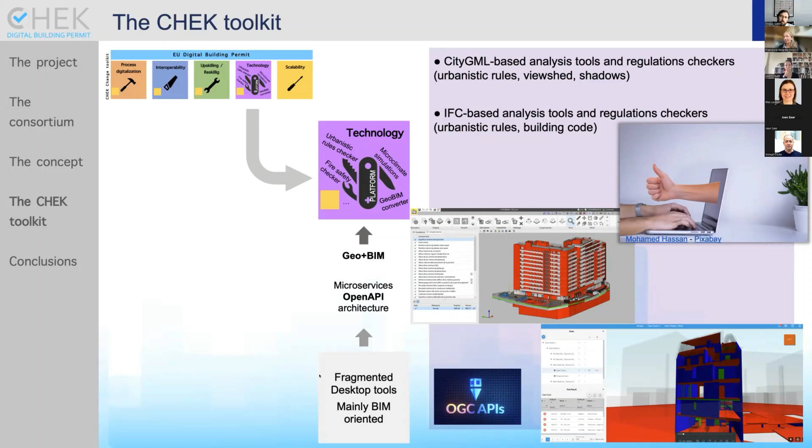We'll develop them further in order to automate the process more, also by the use of standards, and especially we'll care about the interoperability of the different components that have to cooperate within the final tool. Open APIs will be a critical part of it.

Finally, we care about scalability. So we need to demonstrate that our solutions work in all the municipalities we have in the project, but we would like also to involve more case studies within this CHEK community of practice. More information will come soon, but we would like to involve more building authorities, and also other kinds of stakeholders, in order to double check that the information we get as input, first of all to base our developments of, so for example interviews, questionnaires and workshops that we'll do at the beginning, but also to give some feedback on the solutions that we will provide later, to test that they are good for them as well, and they can work for most municipalities in Europe.

So this is more or less our goal. And with respect to scalability, we'll also provide - we have a good connection with standardization organizations. So we provide some standards and best practice documents, and a modular open API-based architecture for the software.

And I conclude here. So we'll have a very practice-based approach, starting from the practice, going higher level with the developments, and testing back with them to provide feedback and improve. We aim to provide this for all European municipalities and other stakeholders involved in the digital building permits. We'll do it with respect to digitalization, scalability, and interoperability, and with respect to all the points of process, data, technology, and people. Thank you for your attention.

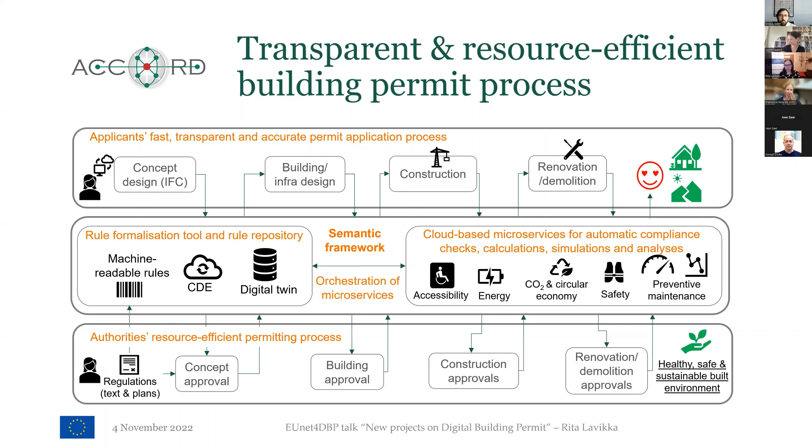In our project, we will focus on this rule formalization and creating a kind of a semantic framework that allows computers to do this data exchange as efficiently as possible, but also maintaining the human in the loop, so that those that are experts in those building permitting issues can focus on those critical issues, not focus on those that computers can make automatically. There are certain things that can be checked, but humans and authorities can focus on those more difficult issues. With these kind of cloud-based microservices, you could do in the background all kinds of calculations and simulations and analyses that can help humans to build a better built environment for all of us. Okay.

This is about our expected results. Similar to the CHEK project, we will start from this basis for sustainable digital transformation. In our project, we think we need a semantic framework for both processes and rules, as well as data and tools.

We also need to think about the processes that building permit applicants and authorities are involved in, and how those should work. We will try to integrate already existing microservices, but we will also develop one new tool from scratch, which helps authorities create machine readable rules. That is something which hopefully will come in the future, so that we write regulations both so computers can read them and so humans understand them.

We will also validate our results in real-life construction projects. In Finland and Estonia, we will focus on environmental compliance issues, but also other issues. For example, in Finland we will also consider accessibility issues.

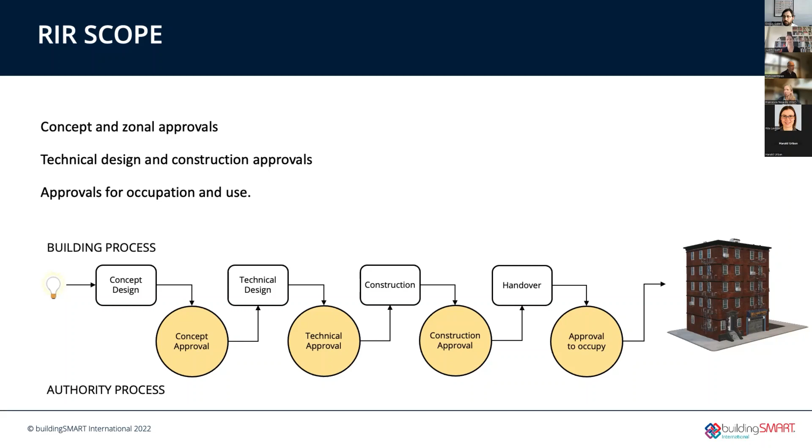We have two ways to harmonize data, or two fields of data harmonization. The first one is very technical - where and how the information is stored. The second one is more about how we use the information - how is the information used and what information is needed. In the regulatory information requirements project, we are handling this. We have basically the technical layer.

Of course, we rely heavily on IFC - that's the core of buildingSMART in general. On top of that, we have lots of different property sets, properties, local and international, and then we have the buildingSMART data dictionary, which can connect those local and international properties and property sets. Beyond that, in the technical layer we also have national and international coding systems and classifications. And buildingSMART has just introduced this new standard called IDS, which we are going to study how we can use in setting up the goals.

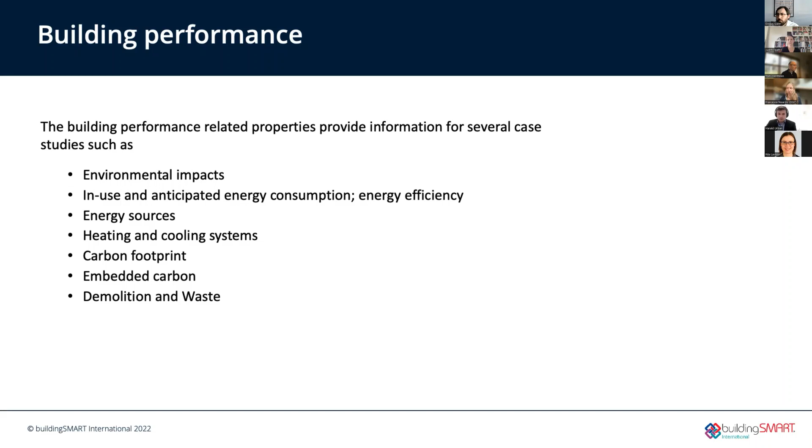Of course, that's a big topic at the moment - energy sources, heating, cooling, carbon footprint, embedded carbon, and maybe also demolition and waste. But like I said, we are focusing on the technical side of these things, and these are just kind of background, initial information for us - what information is actually needed.

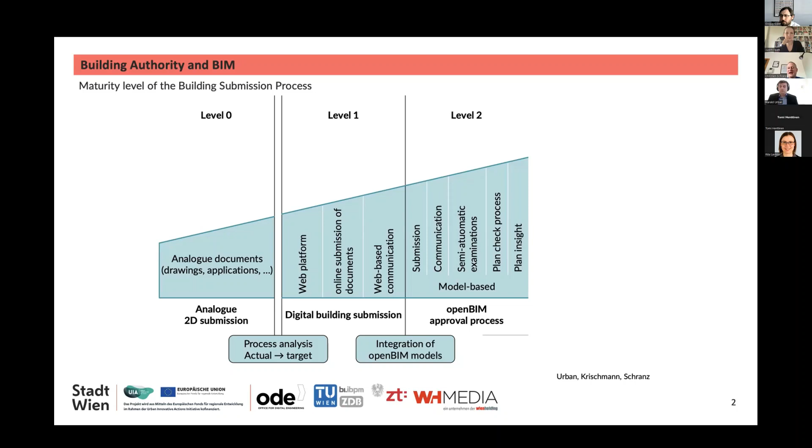The step we are looking at in Austria is the integration of open BIM models, and to make the submission, communication, and everything model-based. So how far are we now?

It's based on 3 different kinds of models. We have the architectural model in level of information 300, which we call BAM, the building application model. We have the checking model, where everything comes together. MA37, as we call it, is the building police in Austria - it's actually the building authority which checks all the buildings. Then we have a reference model, REM, and a model which, unfortunately, when we chose the name, wasn't very smart, because it's called AIM, and AIM is also the asset information model in OpenBIM, but in this case it's the application information model.

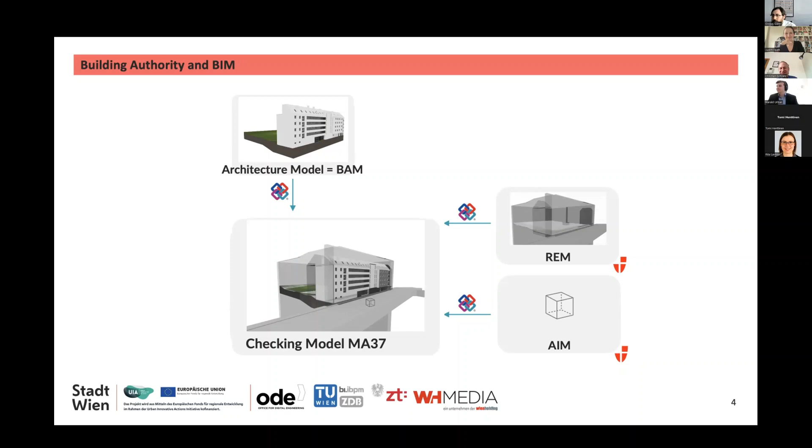We always tell the building authority why they should use OpenBIM. Of course, first, it's no restriction, and the IFC data structure makes it suitable for long-term use, and building authorities have to be able to use the files like old plans for the long term. We always show the Revit file in a text editor, and you can see pretty much nothing - you can't read it, but if you use the IFC file, you can work with that even in 100 years, as long as the file is not corrupt. You can read it, you can make an IFC editor. So the building application model has to include all the information we need from a geometric point of view.

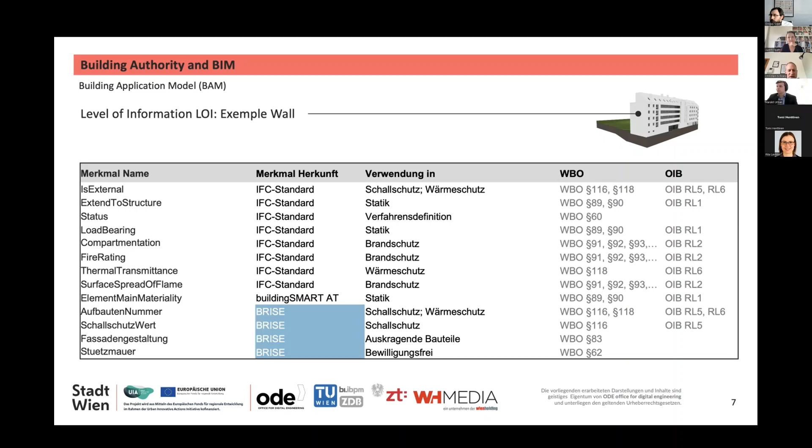We were going through the Austrian standards - you see WBO is the Viennese building code. We were looking at all the different paragraphs and asking, for what do we need which information, and which of them are IFC standard, which are already defined by buildingSMART Austria, which is buildingSMART AT, and which we had to put in as new parameters, new properties, whatever, to include this information.

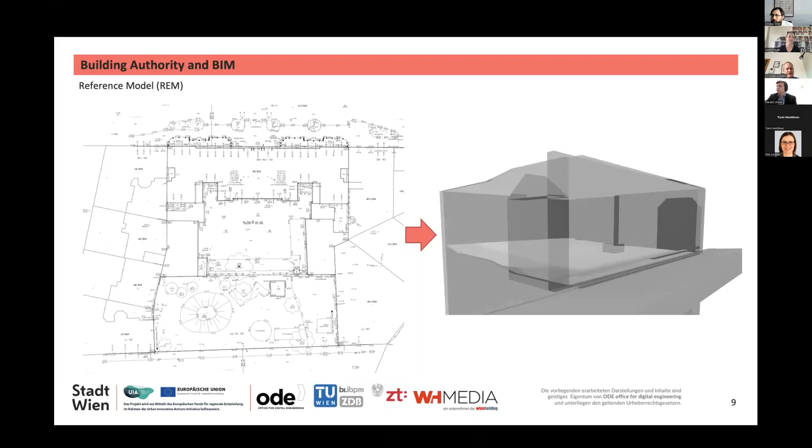The next model is the reference model. The building application model is the model the architecture is doing, and the reference model is when you look at the plan and the construction site, then you have information on how big your building can be, all the dimensions which are allowed by the regulations. So what we make is like a surface model of the allowed model, of the plan. This reference model is done at the building authority.

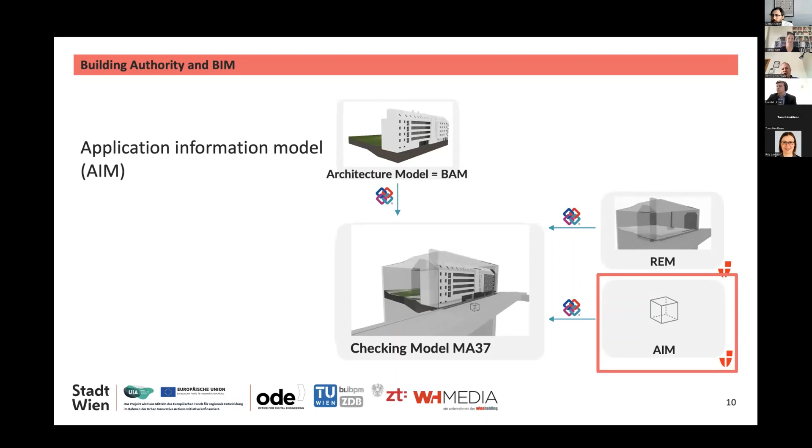And the third one, because you cannot put all the information you need for an approval process in those models, is the AIM model, the application information model, where you have extra information. In Austria, you have specifically some extra information - for example, you have a text attached to your plan, to the construction plan, to this plan where it defines how you can build and how high your building can be. And it says, for example, you have to have a flat roof, and 1/3 of this flat roof has to be a green roof.

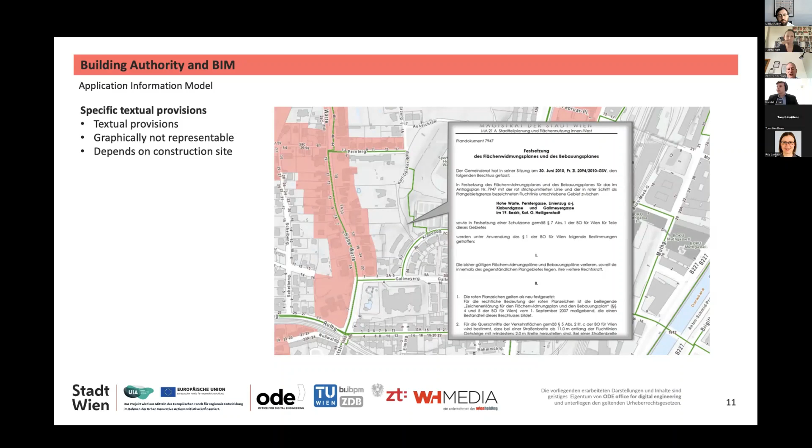And this information you cannot put in as geometrical information because it's not here yet. So we read the text out - we use artificial intelligence to search for certain parameters in the text and give this information to the BIM model, to the reference and AIM model. This is the way we graphically show it: okay, you have a roof, it has to have this certain inclination, different height, and so on. This information, which is just provided as text and not in a geometric form, can be used then.

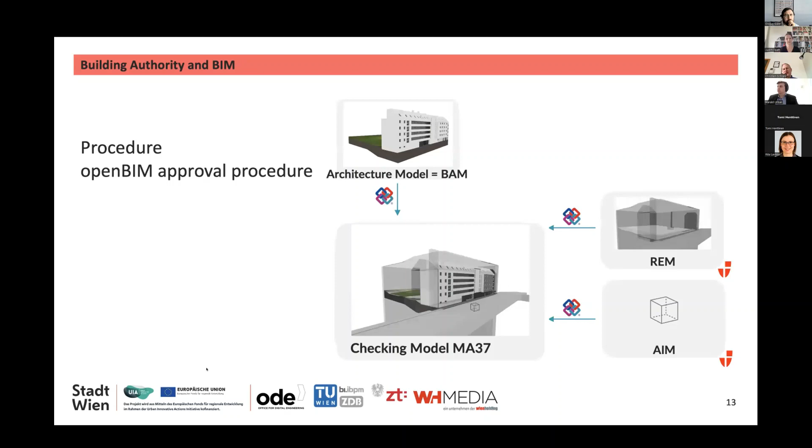And then we put it all together in the checking model, and you see the architectural model, the surrounding model, the surface model, and the AIM, and the checks are starting. We have different kinds of checking routines.

First, before I talk about it - we checked all the building law in Austria, and we found out that about 434 paragraphs can be used for checking. Some of them have to be created completely new, some of them can be programmed in - we use Solibri, by the way, in this case, and can be used in Solibri, but you have to use the API of Solibri. So we were cracking a lot of that. This is the building law checking, and in the structural checking routines, we added a total of 1,222 paragraphs for the checking.

How do these rules look like? We have three different kinds of rules.

We provided one automatic checking rule, so you automatically get a result. Then there's semi-automatic, where you get a result, but a decision is needed by the officer. At the end, the officer always has to sign it or approve it, for legal purposes.

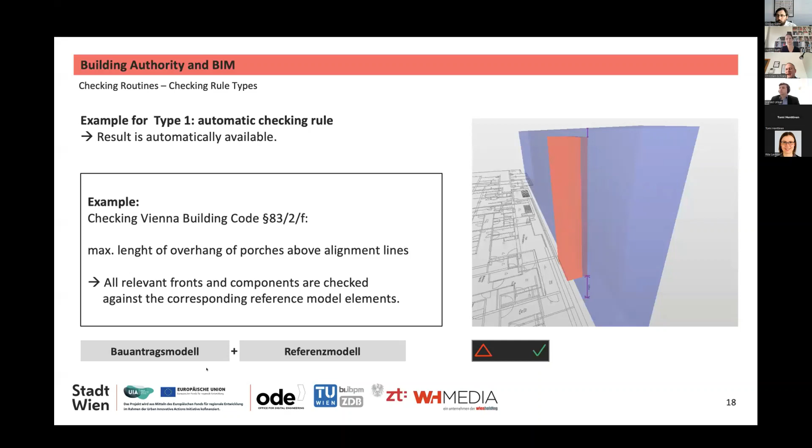There are also supporting checking rules, where the graphics of the BIM model help the officer make a decision. For example, an automatic checking rule: there's a balcony, and in Austria there are certain rules for how far the balcony can extend above the alignment lines and at which height. This can be done automatically. Harald will also show you some rules we programmed which are also automatic.

Another rule example: if you have a bathroom or a room where there could be water, then you need insulation. So this rule shows the rooms which are bathrooms, toilets, and so on, and also shows whether there is insulation below that or not.

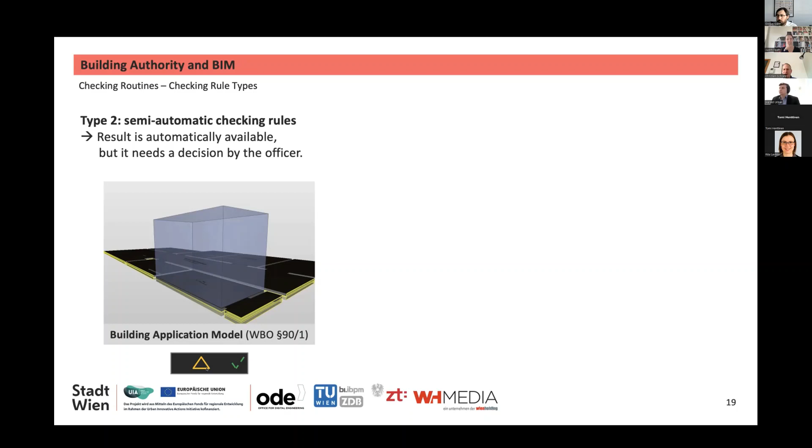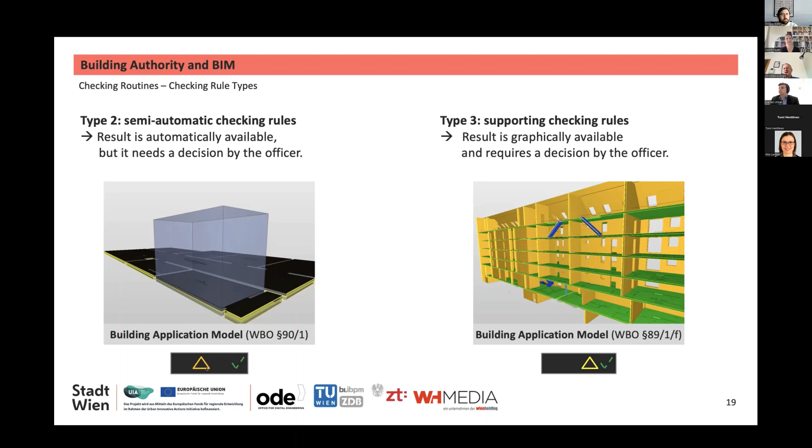The supporting rule would be, for example, to show all the load-bearing construction and whether it's visible. In addition to this graphical representation, you need a pre-static document, but that's something different. The officer at first can say, yeah, it looks reasonable, and then look at the static document.

And now we come to the programming. We want to show you some rules we were using, or that we programmed completely new. And now it's Harald's turn in Vienna.

Hi, so we have also programmed our own test checking rules in this European research project using the Solibri API in Java. Solibri has about 50 templates that you can use for checking. In this project, we programmed 25 additional templates, which massively extended the functionality.

For example, checking the height of the fall protection of the window. In Vienna, this depends on the height of the fall. So for each window, we have to look at the height of the fall and check the length between the window and the covering.

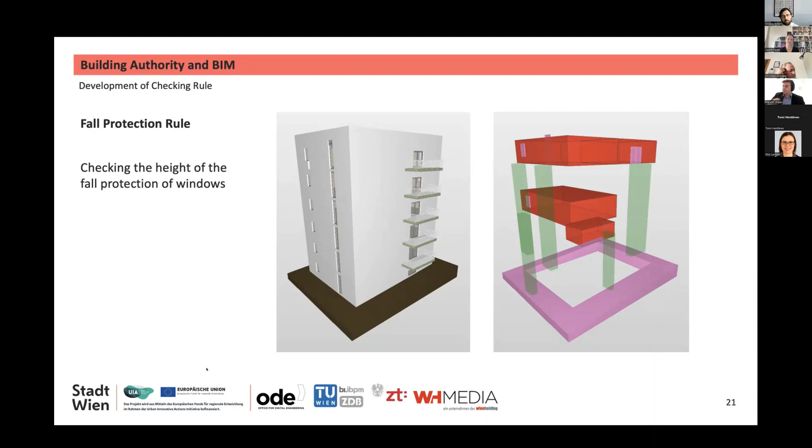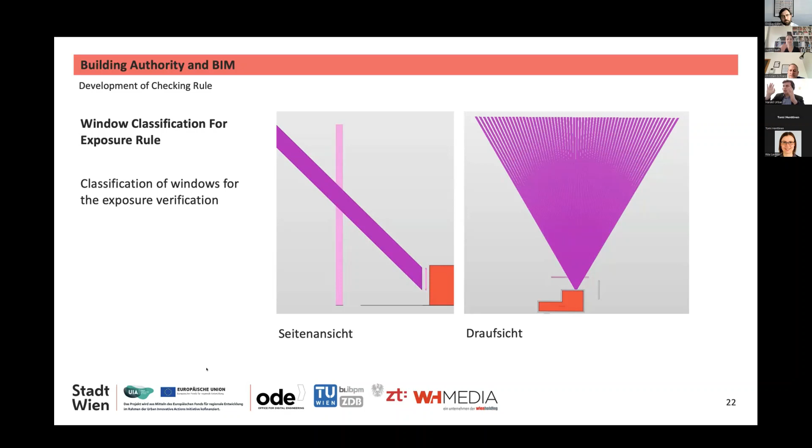The next verification is the verification of a window, used for exposure verification by means of vertical and horizontal building. So we check whether there is a building between this window and the source of light.

I like this next rule because it's very time-expensive to check on the plan. This is the exposure verification of window areas, which depends on the depth and the area of the space. When I was a student, I worked in a building authority and I had to use a ruler to check the depth of the space. With this rule we can automatically, fully automatically, check it with just the start of the checking routine.

Harald, just to add one piece of information: the law in Austria is that for a main room where you can stay and live, at least 10% of the area has to be window area. And this window area, as we saw just before, has to have certain geometric information about the building next to it, so that the sun can really come into the room.

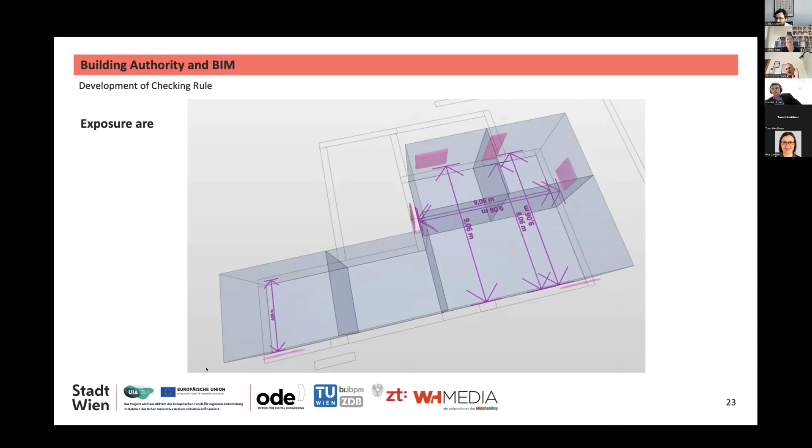And when the space is deeper than 5 meters, you need 10% more than the base 10%. And the most complex rule development is the escape route simulation and testing. With this rule, 90% of all paragraphs in Vienna can be checked automatically.

And the next step, we want to generate a new IFC file from these rules, which includes the escape routes.

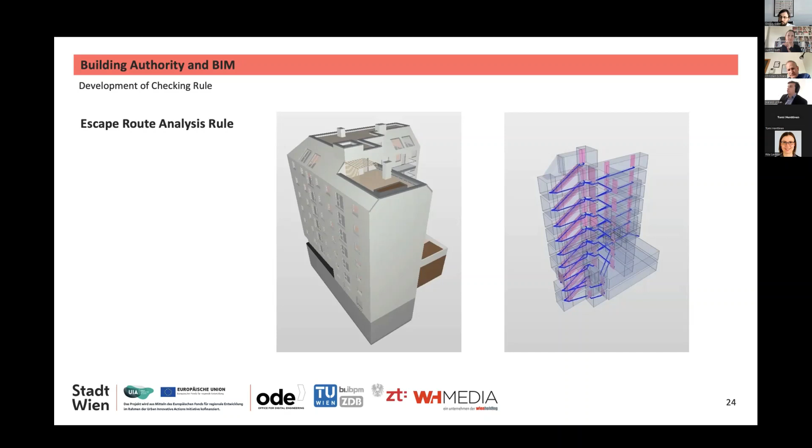So the project has now been running for 3 years and will be completed in March next year. We're therefore already in the final phase, the pilot phase. We now have certain real submissions using OpenBIM that have been submitted and checked. At the same time, we have created 10 test models in different authoring software to see what the problems are, or what is easy, for this software.

According to these models, we're testing the rules and evaluating them to make them better. We have about 2,000 checking rules, and there are some problems, so we tested and improved the checking rules.

Another thing we did is check the software. We have ArchiCAD, Revit, and Allplan, and we are writing a report about which properties are not exported correctly in IFC standard, where we had problems, and how we could solve that.

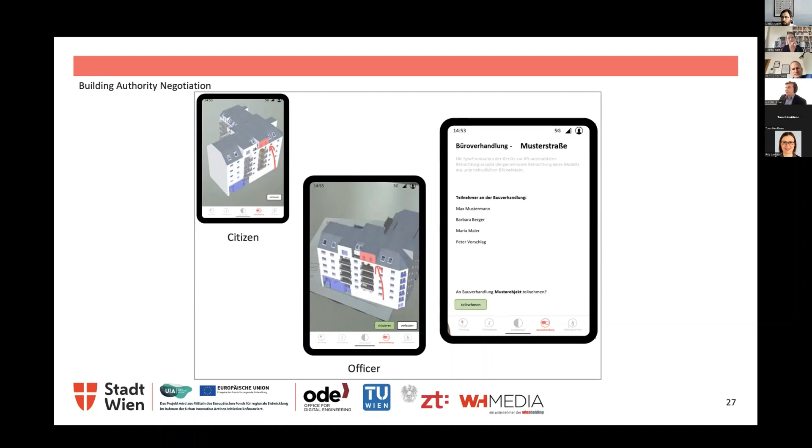After completion of the project, it will then be offered in the operation phase. The project also developed an AR tool for inspection and construction. We have some papers on this, but I'll go to the next slide since we don't have much time.

The pace of how we did it: first we had a process analysis, a BPMN diagram, and I'm very proud that over all 3 years we've kept this BPM process actual. Then we defined the requirements that are legal matters, including the LOI, level of information, and level of geometry for each model.

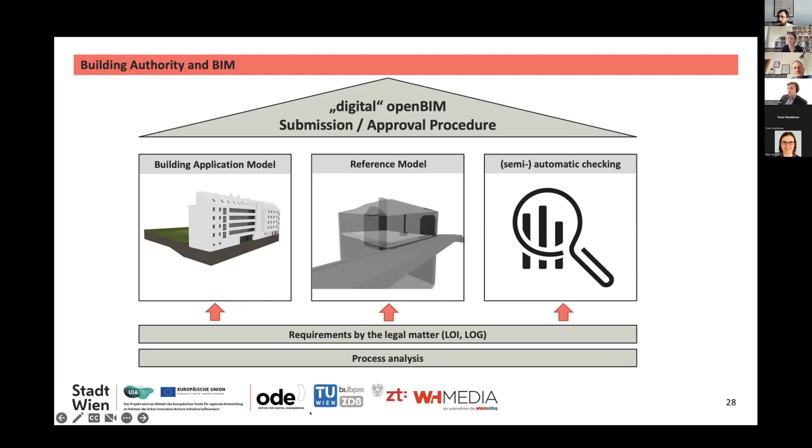This is the OpenBIM submission process in this project. We are now at level 2, and the next step for us in the next project is level 3.

You've seen we used AI and traditional intelligence, but this is a workaround. In the next step, we would like to make the legal text automatically parametric, so we can more easily check the legal text without a manual workflow.

I think this model-based development plan would also work in combination with the reference model and the application information model, because then you have it all in one.

The reference model is a little hard to generate, and you have to check it every time. It's easier when at level 3 you can generate this automatically as a 3D reference model, once decided by the authority.

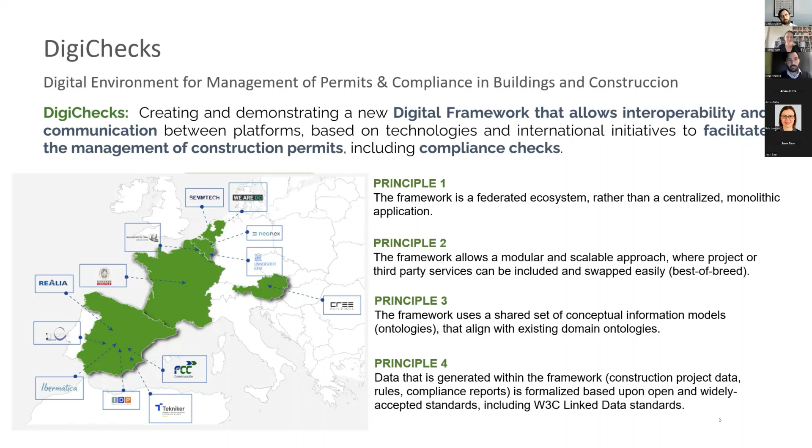I'll explain how we are going to develop DigiChecks through 4 principal steps. The first is to standardize the permit ontology—to create a shared language between all the permitting processes. This language, formalized in a permit ontology, enables the framework to map data from various sources.

The second step is digitizing the permit process—developing enough technology so the final user or authority is able to model their process, instead of changing everyone's way of working.

The third step is building permit rules. As mentioned, some software like Solibri was referenced—it's about using technology to define predefined rules and validate them, based not just on BIM models but also on general databases.

The fourth step is, through an API, integrating the various previous steps into a permit service API, so everyone can connect to our network to interchange that information.

Our objectives and ambition: the ultimate objective is to provide flexibility, ease of use, and efficiency to the permit validation and approval system, regardless of country, region, or municipality—implementing a new form of exchanging information to enable checking and validation. This project will be demonstrated in 3 pilot projects.

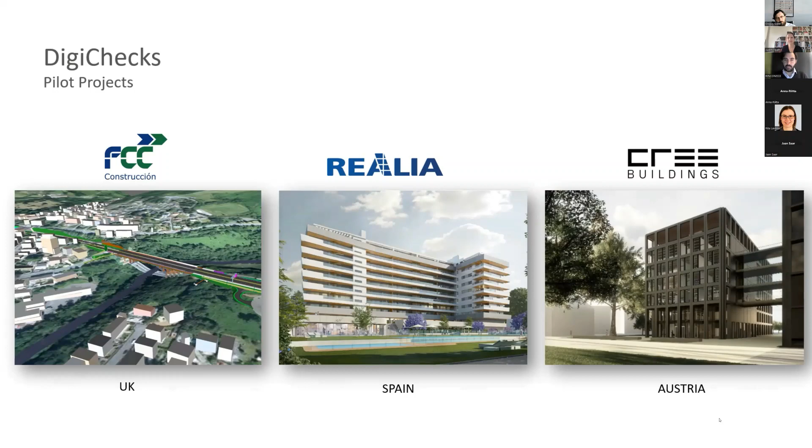And we have a third project in Austria from Cree. It's a prefabricating industry project, a main contractor in Austria. We will validate our third project in that project in Austria. And that's it from my side.